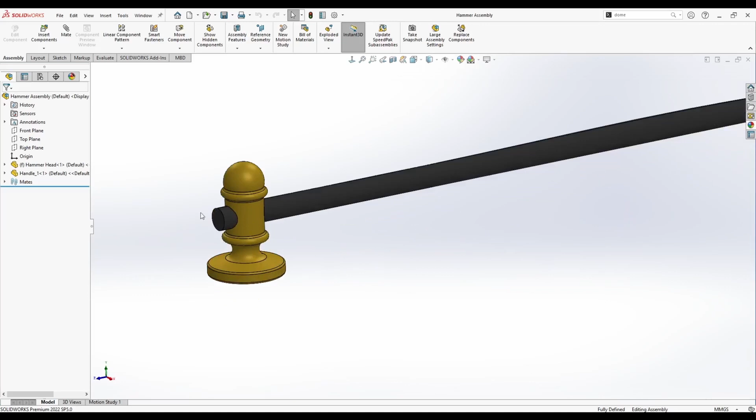Today we will be modeling this chasing hammer, a hammer used by jewelers and jewel makers. Let's get started. We will begin by creating the head of the hammer using a revolve feature, and after that we will make the handle using the lofted boss feature.

Let's begin by creating a new part. As always, I will be using millimeters. Let's sketch the front plane. From the origin, I'll draw a line which will be 30 millimeters.

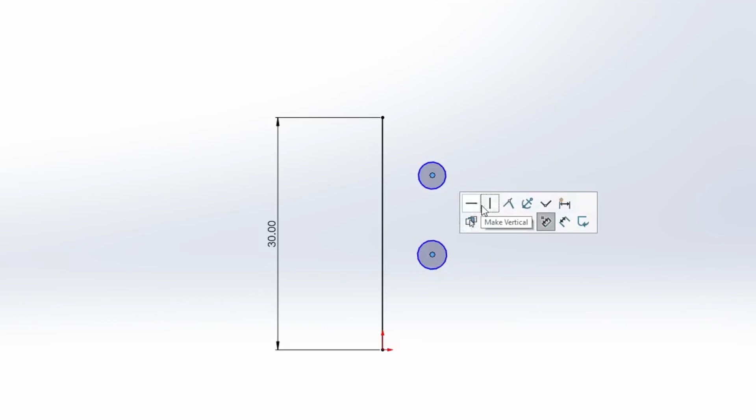Next, let's draw two circles. I will make these circles vertical and equal. And I will make a small center line here, and here too. It doesn't matter how long they are. Make these 2 millimeters in diameter.

The distance between them is 12, and from the origin to here it's 10 millimeters. We also have to add this dimension. Now let's add several more lines.

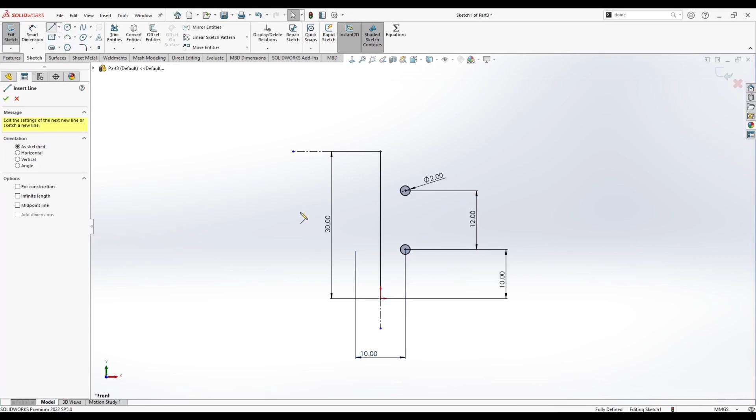This one will be under angle, and now we need a 3-point arc, from this point here all the way up to here. And let's make the arc and this line tangent.

Let's add a line here and another 3-point arc from here. I'll make this point tangent to this line.

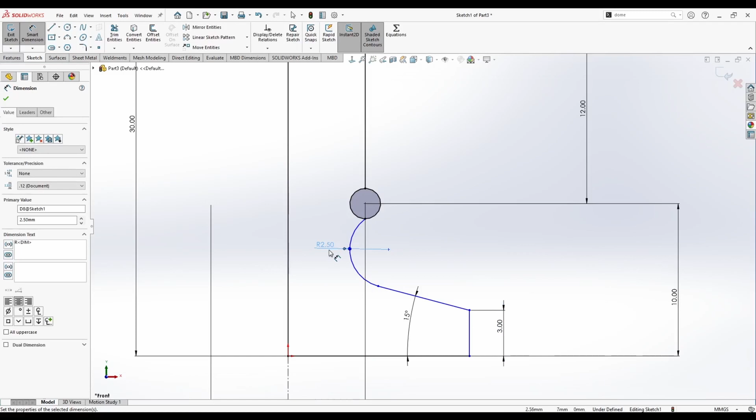Let's add some more dimensions. This angle will be 15, and the height of this line is going to be 3 millimeters. For instance, we require a measurement of 2.5 for this particular dimension. Also, let's make this 24.

Now we have to trim these excess lines. Make sure that you keep trimmed entities as construction geometry checked.

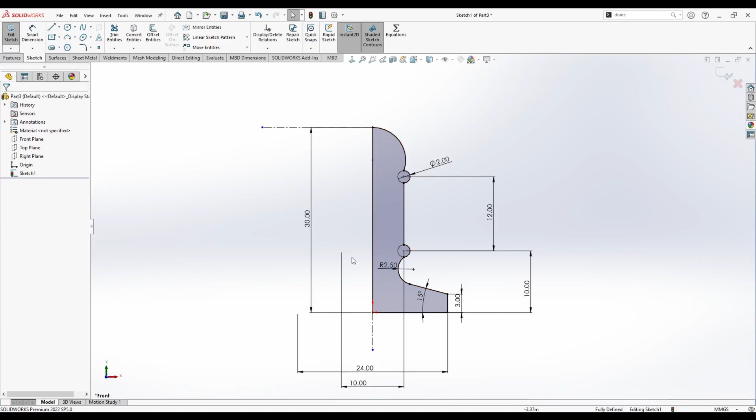Now we have a fully defined sketch and a closed contour, so the idea of revolving is to have a profile contour that needs an axis around which it will revolve. Our axis is this vertical line. This is the contour that you will revolve.

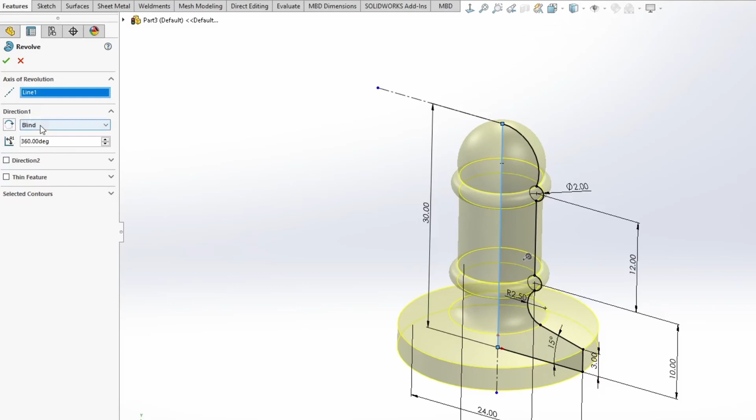Revolve is under Features, Revolve Boss. Let's select it. It's asking us which of these lines is the axis of revolution. It will be this vertical line, and immediately it will make a 3D model. For direction, select Blind and make it 360 degrees. We can confirm this. Let's save the part.

I will name it Hammerhead 1, and now we have to drill a hole for the handle. We will select the front plane and make a sketch on it. I will just draw a center line here.

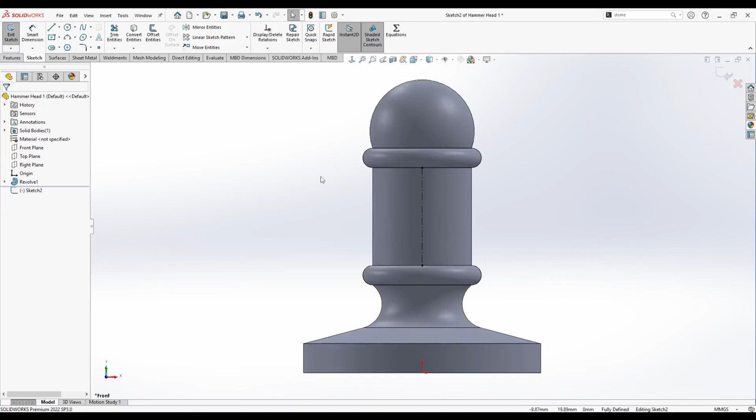We want it through all but on both sides. And let's confirm this feature.

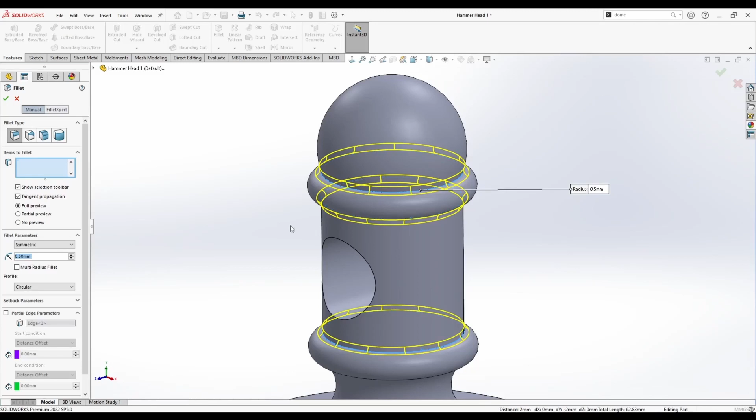We can add a fillet, for example 0.5 at this point and this point too. Let's add some bigger fillets also, maybe 1 millimeter on these two edges.

There we go. We have a simple feature revolve. So we used one sketch to make this part, and an additional one for extrude cuts.

We can add a color to this part. Let's go to Edit Appearance. Let's save this part. Next thing, we will make a 3D model of the handle.

This is how it's supposed to look like. So let's make a new part. I will start by sketching on the top plane. Firstly, I will create a center line that is 250 millimeters long.

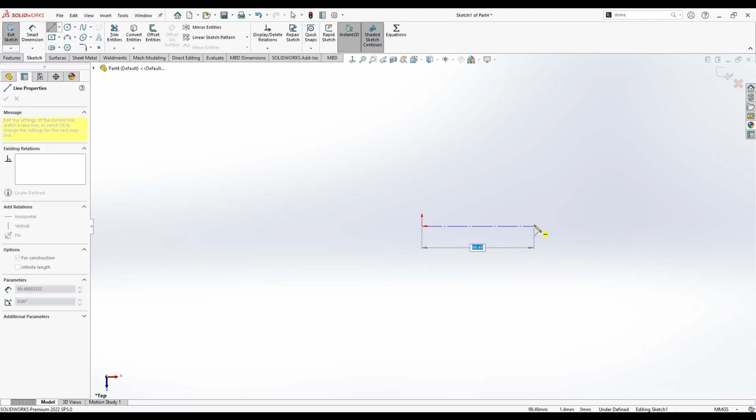After that, I will double-click on the scroll button to center this sketch. Let's add a vertical line and make it a midpoint to the origin. I will make this line 6 millimeters.

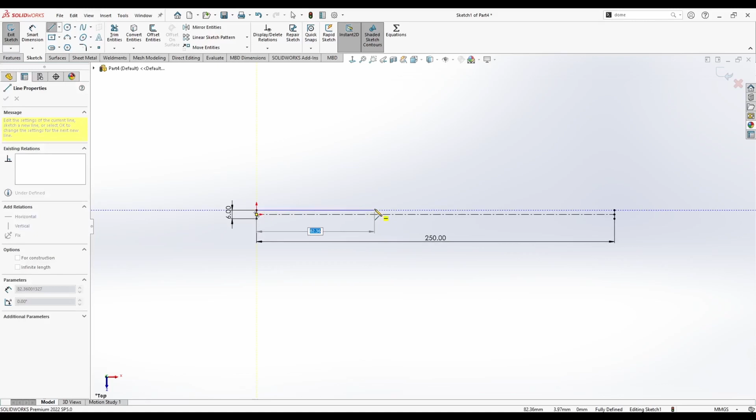And let's add another line on this side. Let's make it equal to this one. The only difference is that this one will be construction geometry. Now let's add a horizontal line and make it 160 millimeters long.

Furthermore, we will use the spline to create another sketch segment. Let's start here, add several points, and press Escape to exit the command. Let's make it tangent to this line, here too. Okay, this looks good.

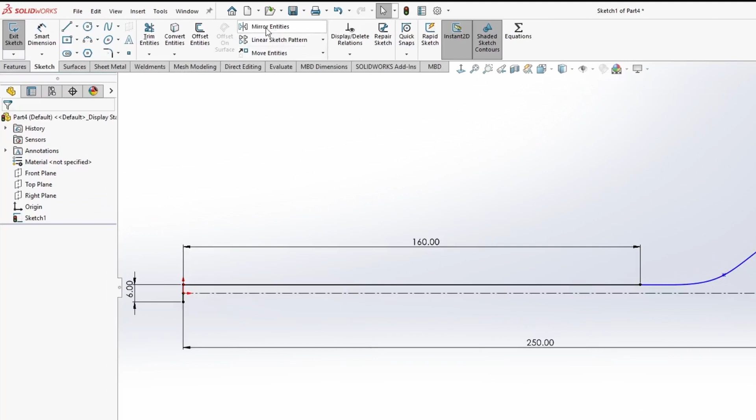Next, I will mirror these two lines on the other side, so let's use this from the Sketch tab. Let's select these two and mirror about the center line. Exit the sketch. We can save this part and name it Handle 2.

Now we will draw another sketch on the front plane. I will start by drawing the same way as we did in the previous sketch.

Let's make this also 6 millimeters. The same thing on the other end. I'll try it here. I will rotate the model a bit and then add this relation here and make these two equal.

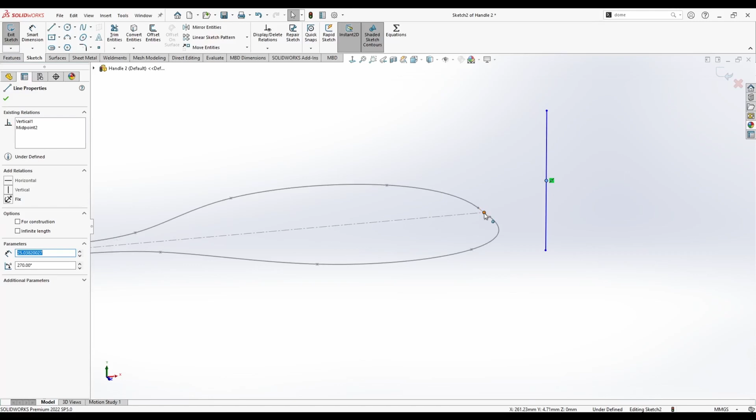But this one will also be construction geometry. Now let's get back here. I will draw another horizontal line, also 160 millimeters long. Let's add another one; it will be equal.

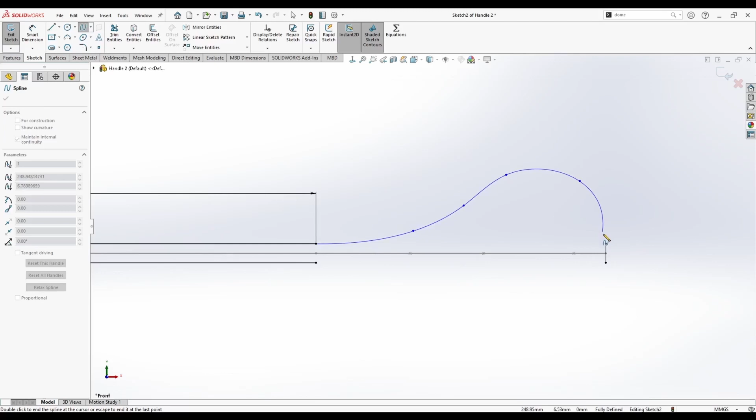And now, like in the previous sketch, we will use a spline tool to add another sketch segment. Let's add another one down here.

Next, I will make this tangent to the center line. This one too, and here we will add tangency. This looks good. Let's exit this sketch also. As you can see, this looks like a handle that you saw in the assembly I just showed.

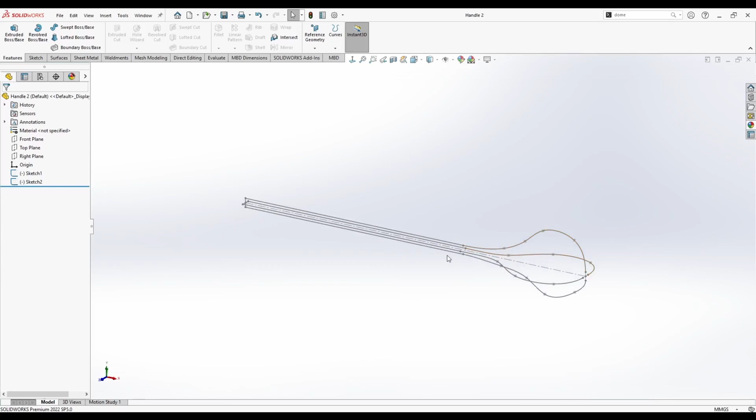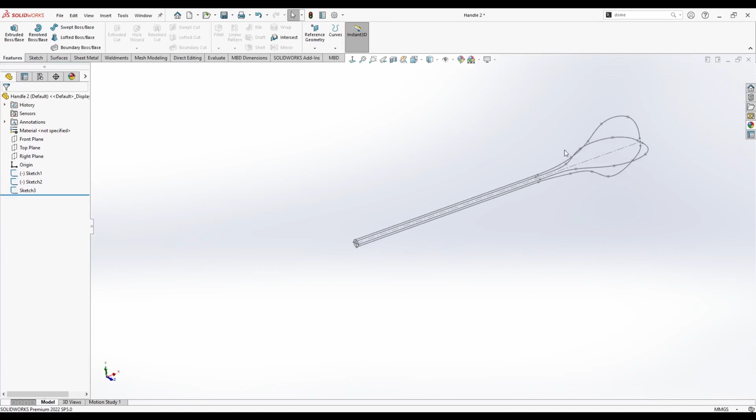Now we also need several cross-section sketches that will define the handle when using a lofted boss feature. We'll start by adding a cross-section sketch. At the beginning of these two sketches, right-click on the right plane. Let's draw a circle, connecting it to one of these points.

It's 6 millimeters. I'll exit the sketch, and now we have to create several planes. Click on the right plane and hold Control, and when you see these arrows, pull it to the right. Let's add, for example, 80 millimeters. Now we have a new plane. Let's sketch on this plane, again adding a circle that is 6 millimeters in diameter. I'll exit the sketch and hide this plane.

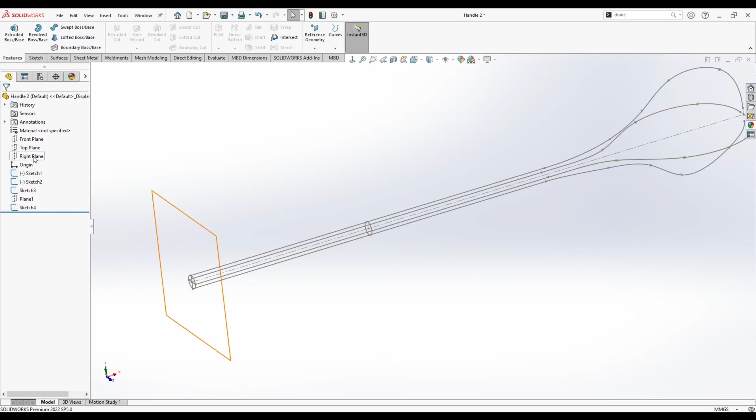Now let's make a new one. I can simply select this point and I'll have a fully defined plane. Let's sketch on this plane. Again, I can connect it here, exit the sketch, and hide this plane.

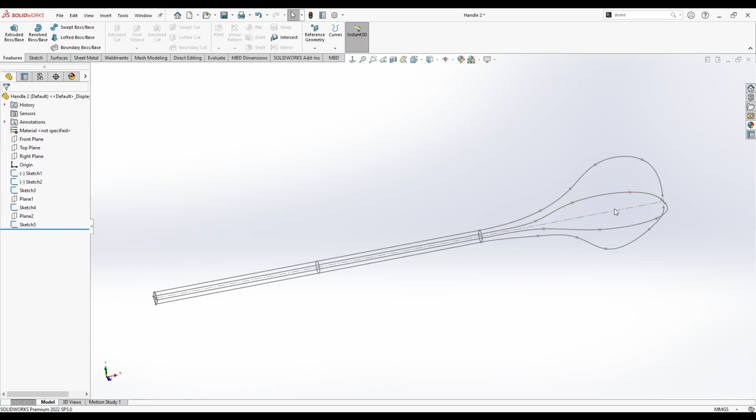Now we should make several cross-sections here to define this part of the 3D model. The more cross-sections you have, the better the loft will be. So let's again start from the right plane, pull it here, and select this point.

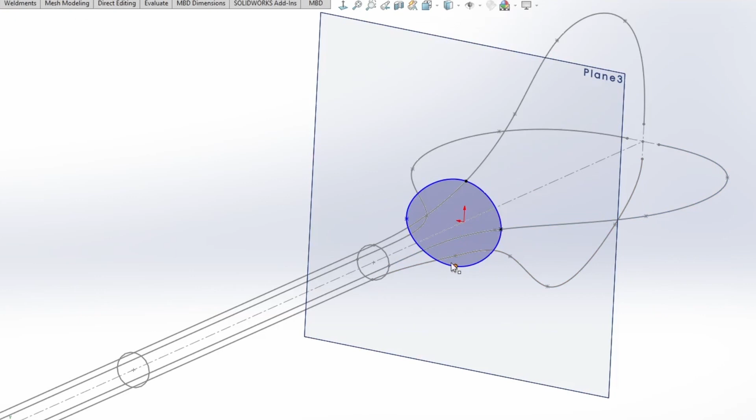Now I'll sketch it here. I'll use the spline tool and start from this point, making 4 points in a shape similar to a circle. Then let's use these points and make relations: this point will be pierced through this line, this point through this line, and this one through this line. Now the sketch is fully defined, exit the sketch and hide this plane.

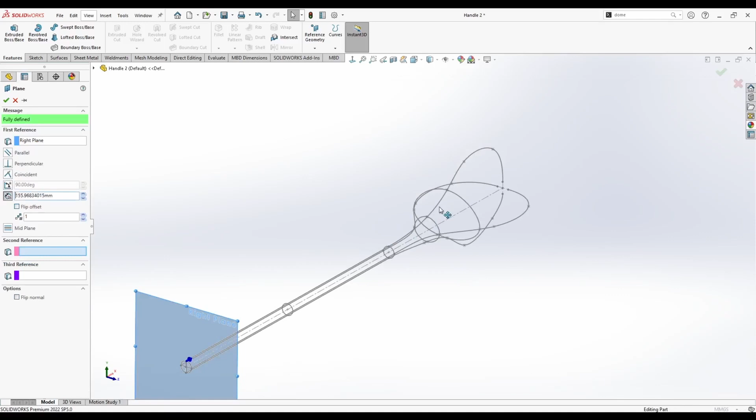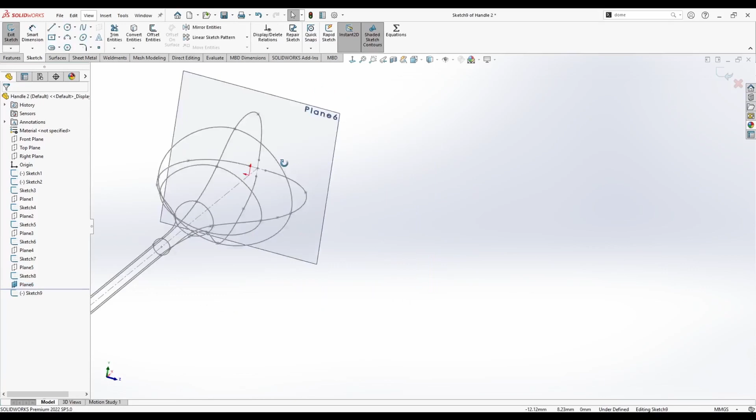Let's make another one. It's the same process, a line starting from this point, with a pierce relation. Let's make another one here using the spline tool. We can add another one, hide this plane, and make another one. At this point, make a sketch and spline, again the same way.

Let's add one more plane all the way to the end here. It's at this point. Let's make a sketch, another circle, connect it here, 6 millimeters in diameter. We can now hide this plane too.

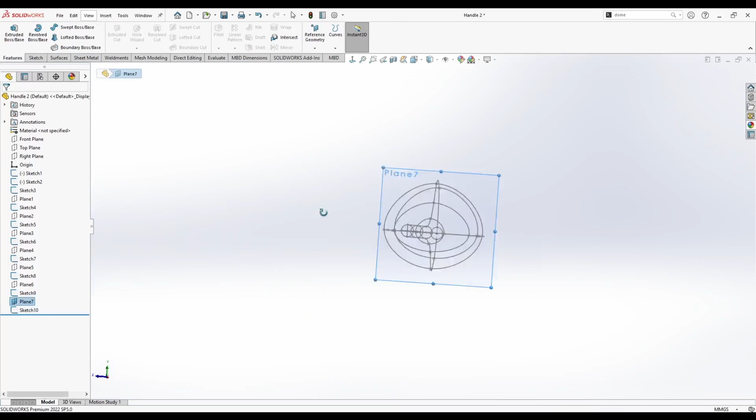Now you can see that this looks like the handle we've seen in the model. Here it is - so we have the outer borders of this 3D model. The next thing we have to do is give it density.

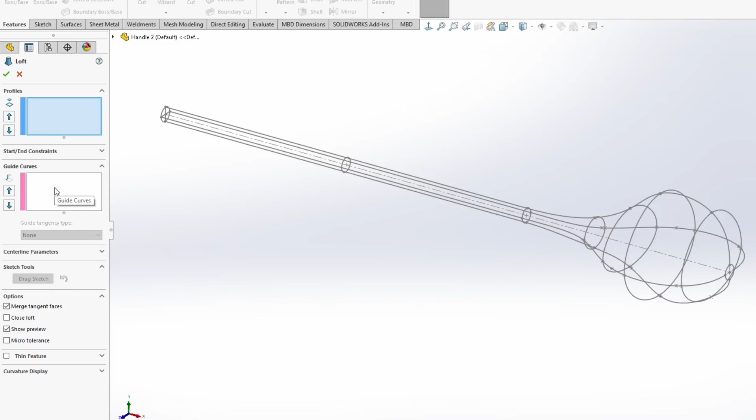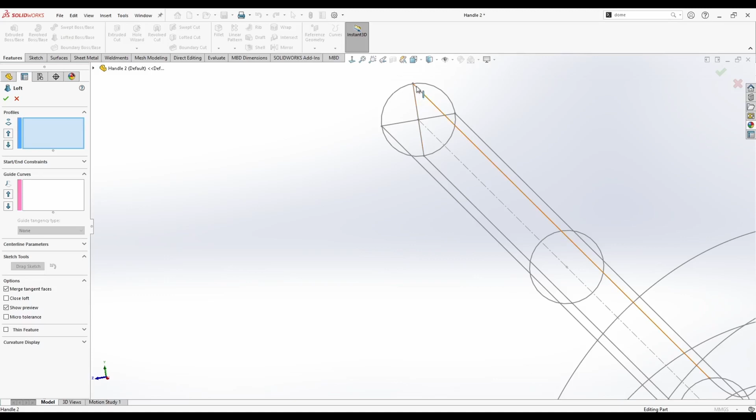Let's go to features and select Lofted Boss. It's asking us for these profiles, which are the cross sections we just made, and for guide curves, which are the first 2 sketches we created. For these profiles there's a very important thing to know: if you look at this circle, it's basically split into 4 segments. If you select this segment for this circle, you have to select the same segment on this one too. If you select this segment here, you cannot select a different one on the other circle, because it will twist the 3D model. So you have to select the same profile.

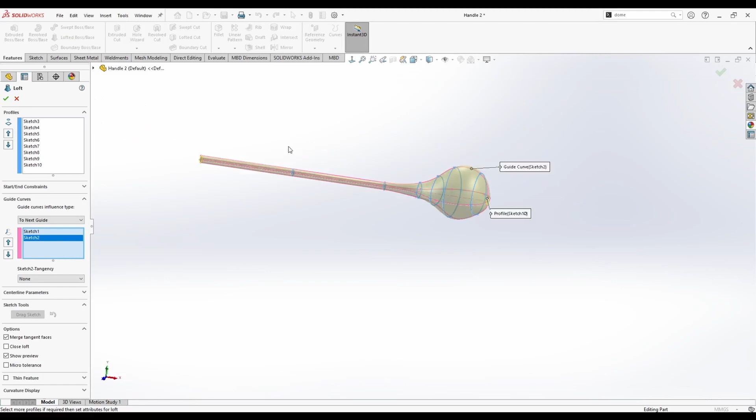I'll select this one here and then here, continuing in the same way going backward - here, also here, and here. Now I have to add guides, which will be this sketch here and this sketch here. You can see that the 3D model is following all of the borders we've given it. Let's confirm this feature.

Because we have a small cut here, let's add a fillet using the command search. Let's select this surface and reduce this to maybe 0.1. When you look at it from the side, you can see that it's adding a small dome.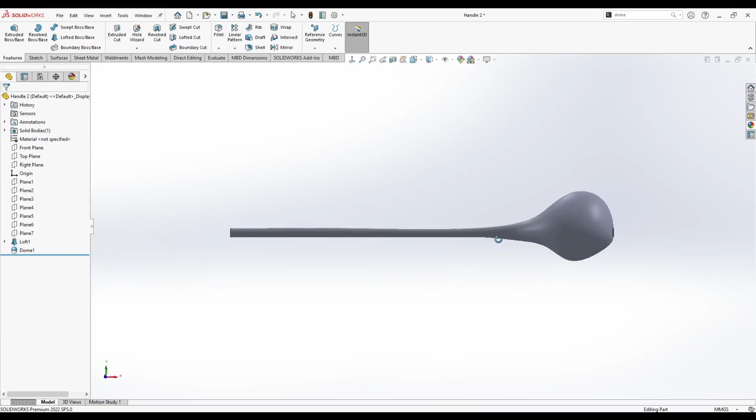Now we have created this handle. Save it, and we can add some color to it - for example, we can use this dark gray.

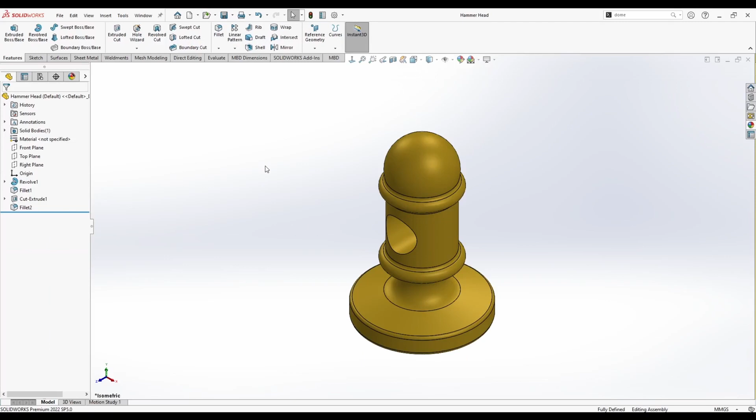Also, we have to create an assembly that will connect these 2 parts. Let's go here to the drop-down menu and select Make Assembly from Part. It will bring us to this small window, asking what should I put in. First I'll select hammerhead, click OK, and SolidWorks will by default connect the front plane from the part to the front plane of the assembly.

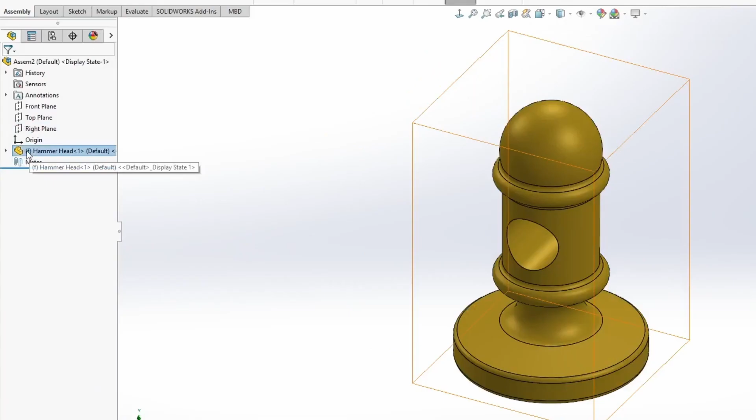The top plane of the part connects to the top plane of the assembly, and the same for the right plane. You can see this small 'f' in brackets, which means this part is fixed, so you cannot move it anywhere.

Now let's add the handle - insert the component and the handle too. Now you see it has a small f sign, but let me delete it. We'll do the same thing for the hammerhead, so its front plane is connected to the front plane of the assembly, but this isn't what I want.

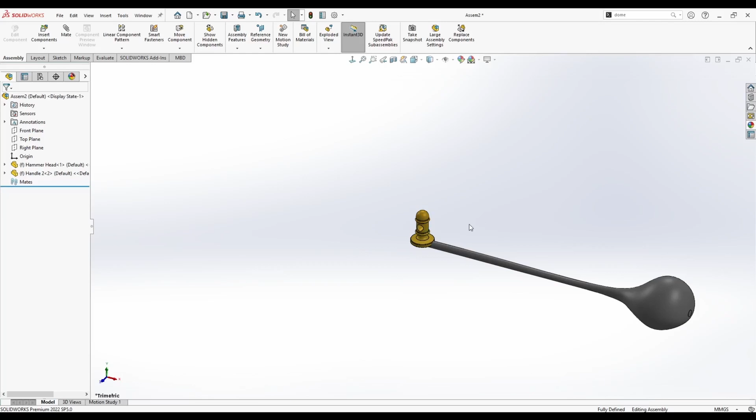So I have to make this handle floating. Let's right-click on the handle and say float. Now if you right-click and hold this handle, you can see that you can rotate it. So let's position it something like this - left-click, hold it, and drag it upwards.

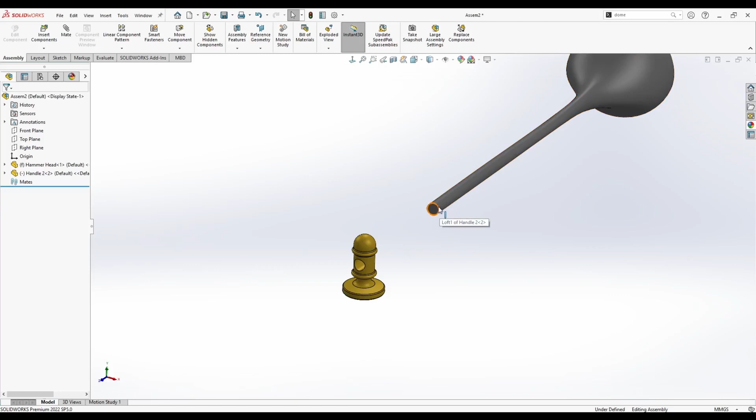Now what I want is to make this surface or this edge concentric to this hole. Let's hold Control here and here. I'll get a quick menu that gives me these options - I want a concentric mate between these two. Let's click it and see what happens now.

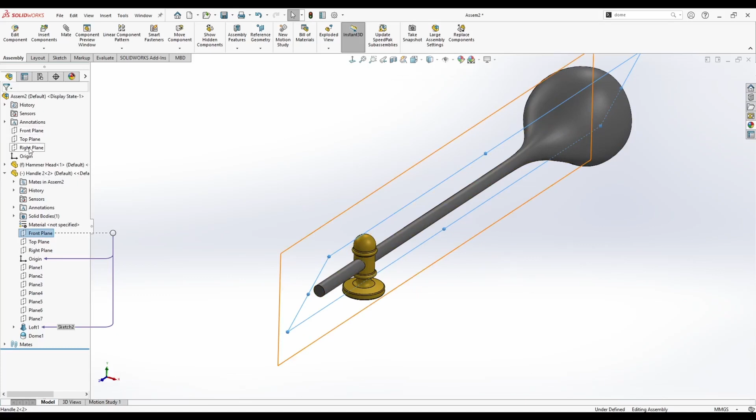The handle is going through the head, but I can still move it and rotate it, so I need to stop the rotation. I can use the front plane of the handle and the right plane of the assembly, which gives me these mates. Let's use parallel - now I can still move the handle this way.

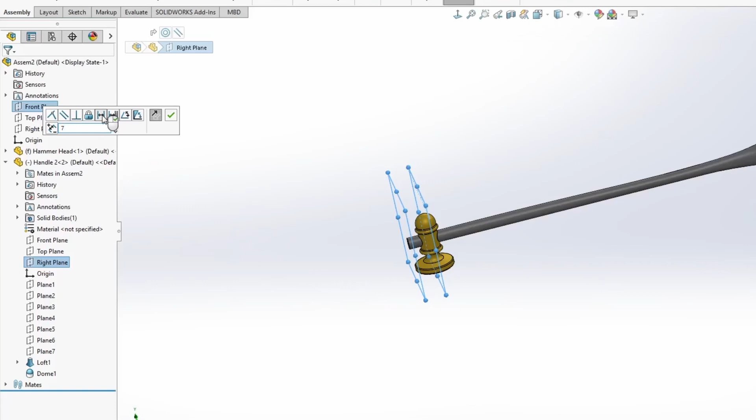So I need to add another mate to fully define the assembly. I can use the right plane of the handle and the front plane, and add a distance mate, for example 7 millimeters. Now you can see that I cannot move this.

And we have lost this minus sign next to the handle. Let's save this hammer assembly.

And there we go. I hope you like this design. I hope you liked this tutorial. See you in the next one.